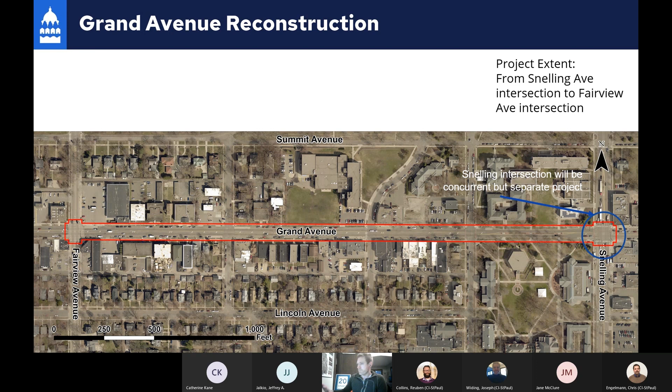The engagement really kicked off in earnest almost a year ago in March of 2022. Since then, we've been going through multiple rounds of engagement and multiple events all over the community, talking about Grand Avenue, folks' vision and desires for its future, and also looking at some location options, which we will review in a moment. Major engagement activity occurred from March to November of last year, with multiple meetings with corridor stakeholders. We've identified Macalester College as a major stakeholder, Hidden River Junior High, Metro Transit as the Route 63 bus runs down Grand Avenue, MnDOT as MnDOT currently owns and operates Snelling Avenue, and the Macalester Groveland District Council. Over the last year, we've had two previous open houses, one in June and one in September of last year. Today will be the third one, in February of 2023.

We've also attended many public events and held some events in conjunction with Macalester.

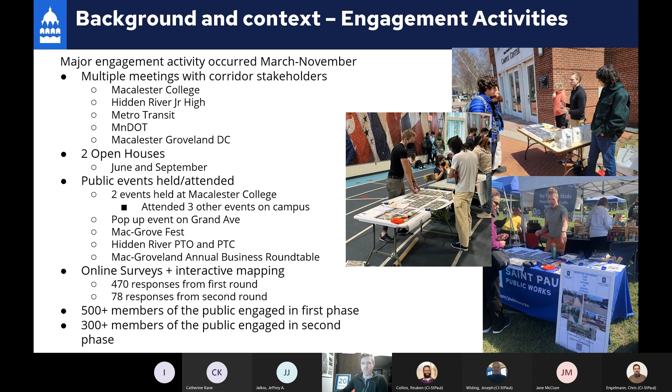The first round of surveys included more questions about how people use the street today, how that affects their day-to-day lives, and what they'd like to see in the future. That one got a lot of response, almost 500 responses. The second round of surveys, which included location options for the public to weigh in on, got relatively fewer responses, about 70. However, we did quite a few more in-person events during that second round to flesh that out a bit more. Throughout these first 2 rounds of engagement, we talked to nearly 1,000 members of the public and corridor stakeholders. So we feel we've got a pretty good idea of what the public is looking for in a reconstructed Grand Avenue. Next, I'm going to go through the location options, which were presented in November of last year for the public to weigh in on.

And we'll go in and see what the public thought about each of these location options and other reasonings why we went with one location or the other. And then finally, when we get to that layout process, we'll elaborate more on some of that reasoning for these design choices here.

So the first option here that we presented to the public was for the Fairview Avenue intersection. Really, the options here were whether to install bump outs, or curb extensions as they're technically called, or not. And as we see here, the public feedback was very much in favor of installing those bump outs, which reduce the crossing distance for pedestrians and increase safety for all users of the intersections. And as you can see, Mac-Groveland District Council also recommended the bump out option.

And one other note here that we also want to look at, as we're looking at some of these design options, is what the crash history of this intersection is. Unfortunately, the Fairview Avenue intersection is one of the few intersections on Grand Avenue that has actually seen a pedestrian fatality in the last 10 years. There was a fatality here in 2015 and also a pedestrian injury here in 2017. So when we're thinking about design choices, that kind of data really impacts what we do on our designs, and again, really helps lead us towards a safer design.

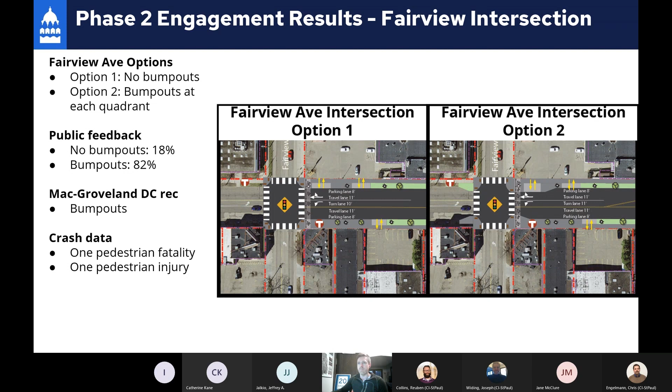Next, we wanted to look at options of potentially installing medians on Grand Avenue, specifically on parts of the corridor where you don't have left turning needs. So that wouldn't be the area between Cambridge and Macalester, more the areas between Fairview and Cambridge Street. The first option was no median, essentially keeping the street the same as it is today. Option two would be a landscape median, so think tree plantings and grass. And option three would be a hardscape median, so think just a hard curb surface with potentially some lighting features along it as well.

Public feedback was generally in support of a landscape median. However, sorry about that, the preferences were not a great majority here. About 57% preferred the landscape median, and about 34% preferred no median. Mac-Groveland District Council recommended the no median option through this section.

Crash data was really showing that safety issues aren't present mid-block throughout this corridor of Grand Avenue. We saw just 7 vehicle crashes over a 10-year period, so that's less than one a year, and one single bike incident over the past 10 years. So crash data really wasn't something we were concerned about through this mid-block section. But there were other considerations that we wanted to take into account when we decided what we're going with on this option for the medians.

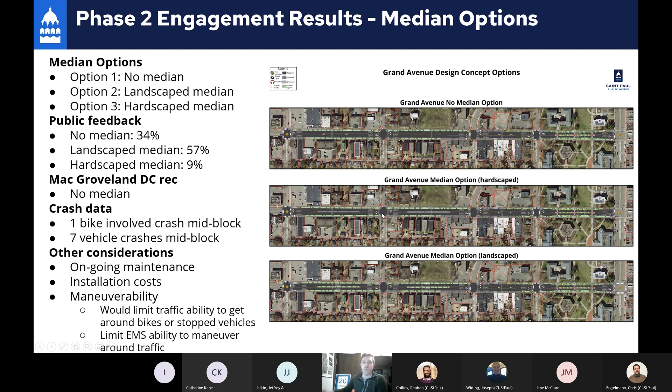Another issue that was brought up through engagement was maneuverability, specifically for emergency services vehicles. If we had a median here with a full parking lane and just a single through lane, that would certainly limit the maneuverability of emergency vehicles getting down Grand Avenue and vehicles getting out of their way. Additionally, there would potentially be issues with stalled or stopped vehicles blocking traffic through this section if a median was installed. So these are some of the considerations we took when we looked at those options.

Looking at the Cambridge Street intersection option, as we know, Hidden River Junior High is located on the northwest corner of Cambridge Street here. So with these options, we want to dive in a little more with a few more potential options for Cambridge Street to really maximize the safety of students getting to and from school.

First option is kind of our typical idea of what an unsignalized intersection would look like, with just those curb extensions or bump outs in each quadrant of the intersection. Option two was looking at a partial intersection median, which you can see here, which would be installed on that western crossing for students. Then option three would be looking at a full intersection median, which would essentially close that median to close Cambridge to through traffic, but allow bike traffic to filter through.

Mac Groveland District Council recommended option two, that partial median. As we see here, public feedback was generally in favor of option three. However, option two was the second most favored, and option one also received a significant share of those responses as well at 23%. Additionally, here, just looking at some crash data. So this is one of the more frequent crash intersections actually on Grand Avenue. Over the last 10 years, we saw 4 pedestrian crashes and 2 of those resulting in injuries.

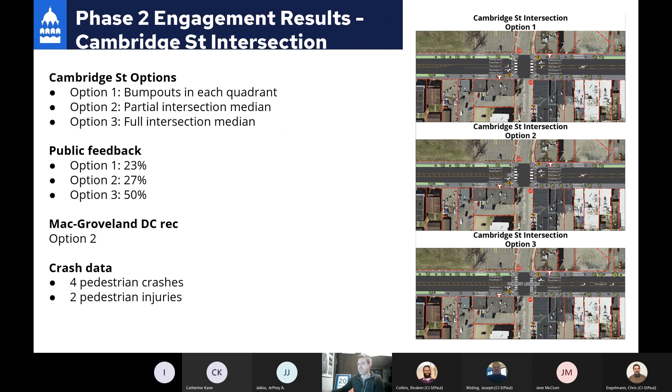Finally, one of the final options we wanted to have the public weigh in on was Macalester College and the pedestrian crossing mid-block here through campus. So the first option we wanted to give out here is just leave as is with those necessary improvements. Today these crossings are not accessible for people with disability, and so option one would be looking at adding those accessibility options, but really not changing the function of the crossings as they are today.

Option two would be looking at meeting a CIB request that we received a few years ago through the CIB process, which would be looking at installing a wider legal crossing in front of the dorms on the western end of the block while leaving the other two crossings as is. Option 3 was looking at improving and consolidating crossings, so creating two legal crossings while consolidating and removing that center crossing in the middle. Option 4 was looking at potentially a large-scale centerpiece legal crossing, so all three crossings would be consolidated into one large center crossing.

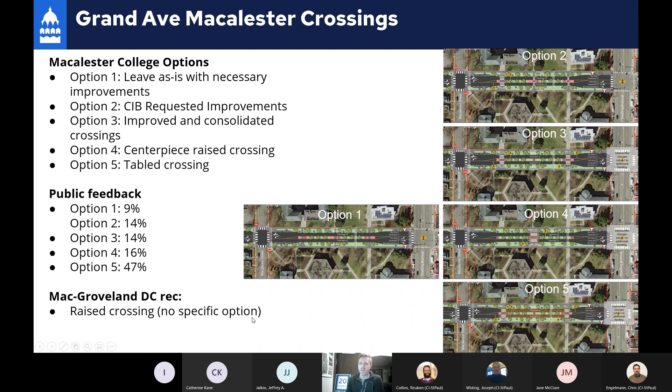And then option 5 was looking at potentially raising up and actually tabling that entire stretch here of the crossings, so you consolidate two crossings, remove the middle one, but actually raise those crossings for pedestrians to cross at grade. Public feedback was not a majority on any one option. However, option 5 saw nearly a majority at 47%, which would be that raised and tabled feature. The Mac Groveland District Council recommended a raised crossing, but no specific option on how those crossings would be put together.

Now that we've reviewed a little bit about what we reviewed over the last couple of months here, we're going to move into the recommended design. First, we'll look at some overall features of the design, and then we'll go block by block to look at how that looks on a layout view. So this design for Grand Avenue is really consistent with multiple city policies, specifically the comprehensive plan and the pedestrian plan, which are both policy documents driving us to create a more pedestrian-friendly and multimodal city. And so with this plan, we're looking to increase space for pedestrians and greenery while not impacting parking at all.

So curb to curb width will be narrowed from about 55 feet today to 48 feet in the proposed design, which would be about a 7-foot roadway width reduction. We're able to do that because today the existing width of the roadway from curb to curb is much wider than what we really need to accommodate all these functions. So with that reduction, we're still able to have our typical 11-foot through traffic lanes, which will be narrower than the existing, but typical of what we do on reconstruction projects.

We're looking to maintain that 10-foot left turn lane as is today. And then we're looking to narrow the parking lanes to 8 feet, which is also a typical sizing for projects that we do today. So we're able to maintain all that space for vehicles while also giving back significant space to pedestrians. So that total non-vehicle space will be widened from about 25 feet between both sides of the street today to about 32 feet. So adding about 7 feet, or about 3.5 feet on both sides of the street.

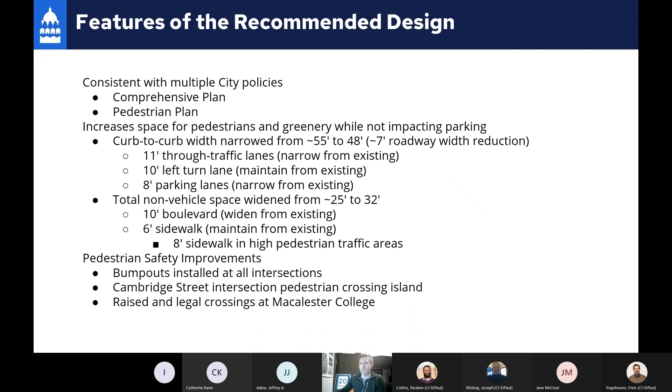At the Cambridge Street intersection, we're looking to install a pedestrian crossing. We'll look at what that looks like in a moment. And then finally, we're looking to install raised and legal crossings at Macalester College to better accommodate student crossing needs. So this is what it looks like in a cross-section view. This is essentially if you cut the street down the middle and look at it straight up. This is how it looks laid out in visual form rather than word form.

See those 11-foot through lanes, that 10-foot center turn lane, those 8-foot parking lanes. Then you finally have your 10-foot buffer, which is your boulevard space, and your 6-foot walk space. How this would look in a typical bump out cross section is in the lower left here. So it'll be about 36 feet to cross for pedestrians from curb to curb, which is significantly less than what it is today at about 55 feet. You see you've got extra space for your bump outs, your curb extensions, and your sidewalk space as well.

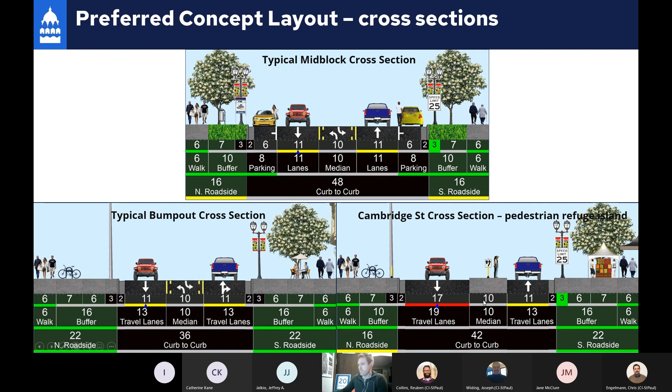And then finally, on the bottom right here is how a cross section will look at Cambridge Street, where you have that additional crossing feature for the students getting to and from school, where you see that center turn lane median is now a raised crossing median. Now we'll look at the layout and see how that looks from top down here, and I'll walk block to block.

So first, we've got Fairview Avenue here, where you see those proposed bump outs, curb extensions at each quadrant, again significantly narrowing that crossing distance for pedestrians from 55 feet today to 36 feet. Moving through here, you can see that widened boulevard space. You can see Wheeler Street here, which also has those four quadrant curb extensions, which will be narrowing that crossing distance for pedestrians and serving as traffic calming for motor vehicles moving through here.

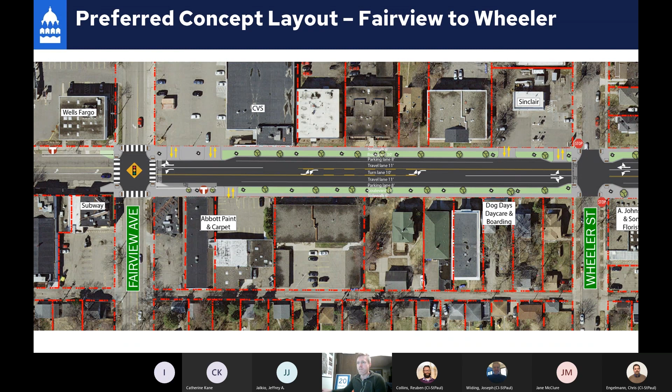Moving further east, we're looking here at Cambridge Street. I will zoom in on Cambridge Street to talk a little bit more about that. So Cambridge Street here is a unique situation. This is an area where we have an active junior high with many students walking and biking to school during those months where it's most appropriate, so during typical fall and spring school sessions.

And so the reasoning here, thinking about this intersection, is that for pedestrians on the west side, those students getting to and from school, we really want to maximize their safety. And so the design here shows a center median being converted into a crossing median, a pedestrian crossing island, that allows students to do a two-stage crossing so they can cross one direction of travel, they can stop, they can wait, and they can cross

the second direction of travel separately, and increase their safety, their awareness, and their visibility as pedestrians moving through here for vehicles to see and yield to them as they're making their crossing. Some additional data we also collected here to help drive thinking about this crossing treatment is that we saw a pretty significant difference between crossings on the east and west leg of the crossing.

So the west leg today, where that additional infrastructure will be installed, saw about 4 times the crossings in a typical day, 400 to 100, and about 4 times the peak hour as well, about 88 in that peak hour at 3 p.m., which coincides with school getting out of session, a lot of students walking across, getting back home.

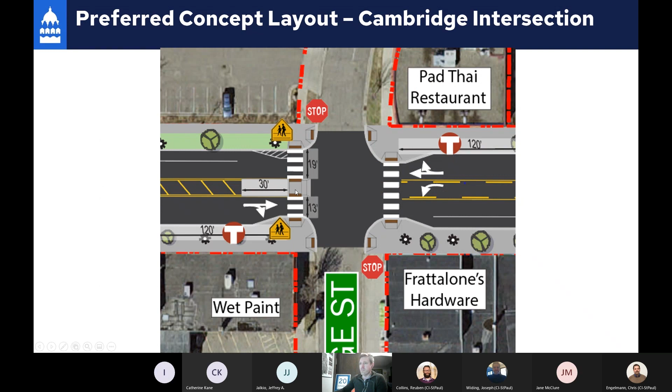Another reason why we thought it was appropriate to close that left turn lane and convert that into a crossing island here is we also counted those turning counts going from eastbound Grand onto Cambridge Street, and they really were pretty low. We only saw about 94 left turns taken in a single day, with about a fifth of those turns associated with student pickup and drop off for parents at the parking lot up here.

Working with Hidden River Junior High, they will actually be rearranging that pickup and drop off operation and shifting that further north. And so we think these left turn counts would actually decrease with those changes that Hidden River will be doing on their project in the next couple of years as well. So with those ideas, we thought it was appropriate to close that left turn lane and convert that to a pedestrian crossing island.

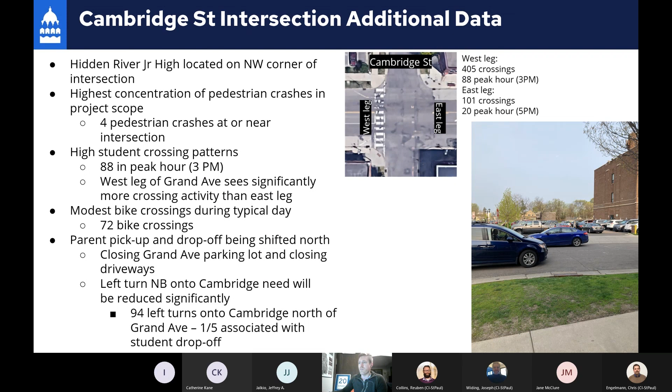A little more information on this crossing island. We've heard some feedback that some folks think that northern lane width at about 19 feet is a little too wide and could cause issues. However, looking at some additional data and examples from around the metro, it seems to be in line with what we see in a lot of other areas with pedestrian median islands, and also those safety increases from those islands. We've got studies that show about a 56% reduction in pedestrian crashes from refuge islands themselves. That's a pretty significant reduction in crashes.

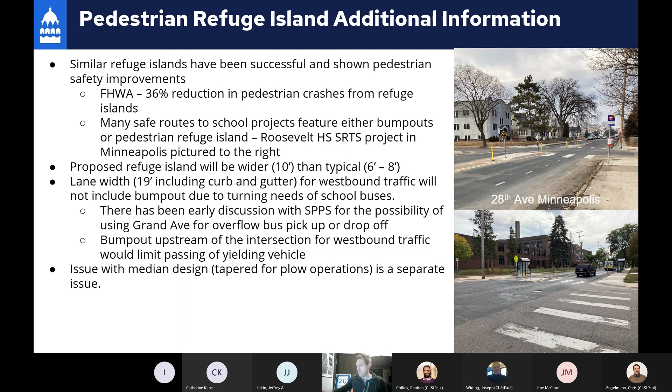One more issue that was brought up is that some folks have an issue with median design and how the curb lines are tapered for plow operations. However, that's more of a maintenance issue, and I think that is a topic for another day.

One other point we also want to make is one of the reasons why we didn't include this curb extension on that northern area, reducing that crossing distance, is because of the need to accommodate school bus turning movements. Cambridge has school buses pick up and drop off. Today they pick up and drop off on Summit Avenue, on the north side here. However, we have been discussing with them potentially utilizing some of Grand for those purposes, so we do want to make sure that school buses can make that turn.

And so, as you can see here, we ran a turning template to understand what this would look like and confirm that yes, we would need that entire space to accommodate those bus turning movements. And so that is one of the reasons why we did not include that northern curb extension for this intersection.

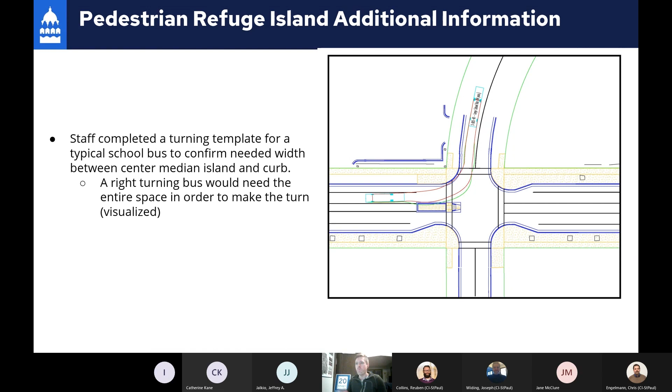Moving forward, looking at this, the block between Cambridge and Macalester Street, this is the block where we see the most retail and commercial activity. We've got a pretty intact old streetcar kind of setup here with a lot of retail shops and restaurants and cafes. And so as you can see here, that sidewalk space expanded to 8 feet, that boulevard space at 8 feet really gives you about 16 feet of room for wider cafe dining, for more product display, for more comfortable pedestrian walking through this area as well.

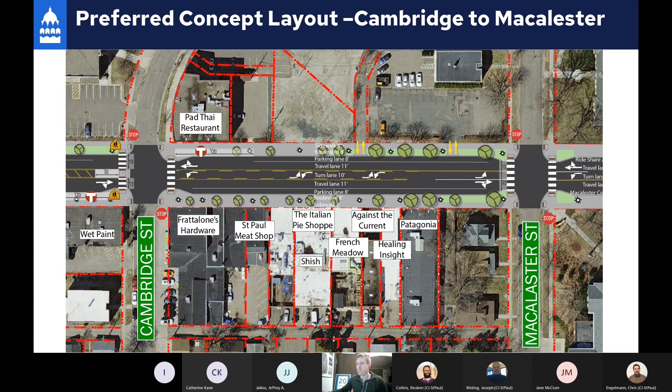Now, looking forward, one more on the last block here. This last block is going to be probably the one that most folks are interested in. This is the Macalester campus block here between Snelling and Macalester Street. So really looking back at some of that feedback we got from residents and students and other users of the street, really looking at improving and emphasizing pedestrian safety getting across the street here was something that we really wanted to emphasize and look at identifying here.

And really those raised crossings is something that we really have decided with the public that this is the way to go forward. So a raised crossing, well, there'll be a 3D image of what this looks like in a second, but a raised crossing is essentially the street comes up to the sidewalk level. So pedestrians, as they cross, they no longer have to go into the street to cross. They've got a straight, flat surface, and the vehicles have to come up and come back down, almost like a speed bump in a way.

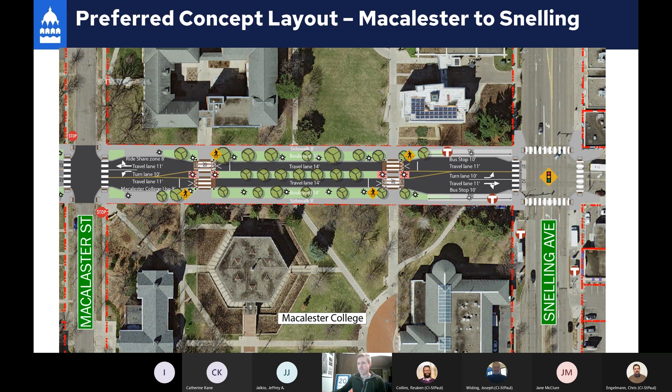But they're a little different in the fact that they're actually crossings and they're wider, and they actually provide a pretty safe and pretty easy path for everyone to utilize here. These crossings would also be legalized, and they would be requiring vehicles to yield at them. And you can see here also that middle crossing would be closed as well to consolidate into those two outer crossings. A little more additional information on why this alignment was chosen.

One of the things that we've heard in initial feedback is the width of the travel lanes through the mid block here at about 14 feet. Some thought they were a little wider than they maybe need to be. However, this 14 feet is continuing on what we've already had there in place since 2008 with the median project and with Macalester. And really this 14 feet is kind of the minimum we can do for a design like this with a large center median and just a single travel lane.

We need that extra couple feet for what we call curb reaction distance. So that's where your curb and your concrete goes at the edge. And so when you include those for both the median and the outer curb of the cross section here, you actually get about 11 feet for your actual travel lane, with about 2 feet and 1 foot for those curb reaction zones. So that is pretty typical of a design here, and really the minimum we can go for at this area of school here.

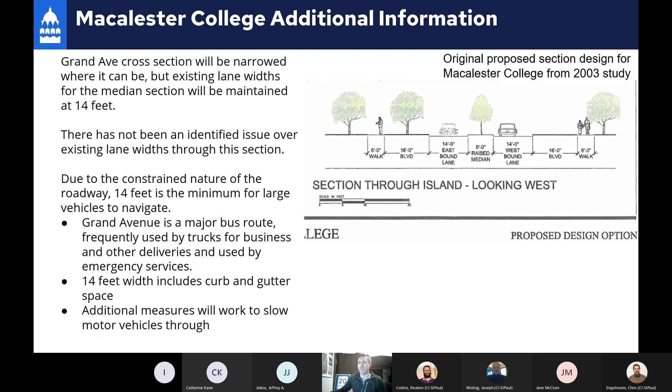But looking at why we went with these two legal raised crossings, this additional treatment here to identify for pedestrians. One of the biggest drivers here is just the pedestrian volumes crossing the street. So we did a pedestrian study. We counted every person crossing Grand Avenue mid block during a typical school day, and we saw nearly 5,000 crossings between the three.

So that's 1,800 at the one closest to Snelling, another 1,900 at the one closest to Macalester, and finally just under 1,000 at that center crossing here. So really some of the highest pedestrian crossing counts in the city. I haven't seen crossing counts this high. And so really this leads us to a unique situation where these volumes, the way Grand Avenue interacts with campus, means these mid-block crossings are likely going to happen no matter what we do.

So I've heard people asking if we could close all these crossings and have students go to the intersections to make those crossings. And I just don't really think it's realistic to expect those 5,000 crossings to all be moving to those intersections and then coming back onto campus again.

And so really looking at accommodating these existing flows and making sure that these crossings are consistent and reliable, that we know exactly where they're going to be taking place, that we know who has the right of way at these crossings, and we know how these crossings work for both drivers and for

pedestrians. And a little additional information that we also found was interesting was working with Macalester. They're doing a campus master plan here, and this little image on the right here with these gray lines kind of shows the walking patterns of students and faculty and staff through campus. And you can see here those two outer crossings definitely, again, see the most crossings.

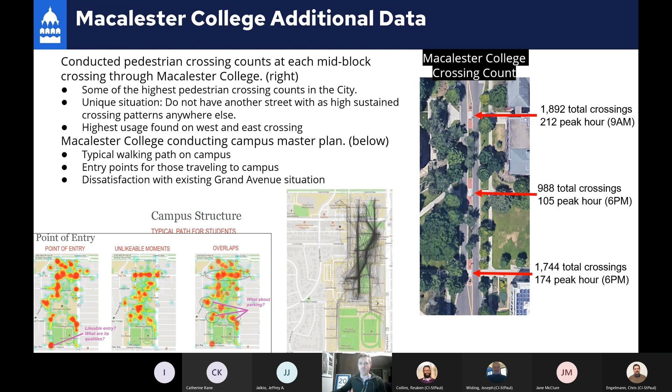Real quick here, I'm going to show a quick 3D rendering. It's sometimes hard to visualize what this could look like from a top-down view, and so we wanted to put together a quick little 3D rendering of what these raised crossings could look like on campus with those additional widening features and landscaping features here.

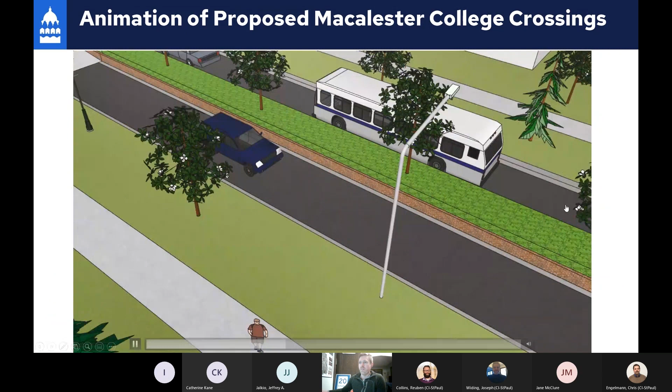So you can see here we're looking at the eastern end. We're moving over to the eastern end here, close to Snelling. This would be your eastern crossing, your western crossing over there. See the bus stop here. We can see other design features and kind of see that more in that 3D view here.

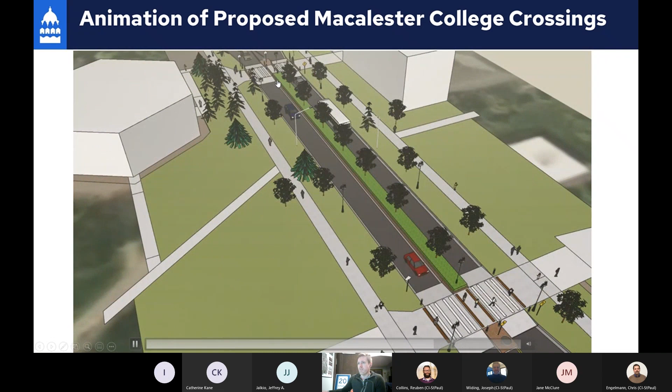So this video is on our project webpage. If you'd like to look at it again, you can certainly check that out. So just to give people a little visual representation of what this could look like in 3 dimensions.

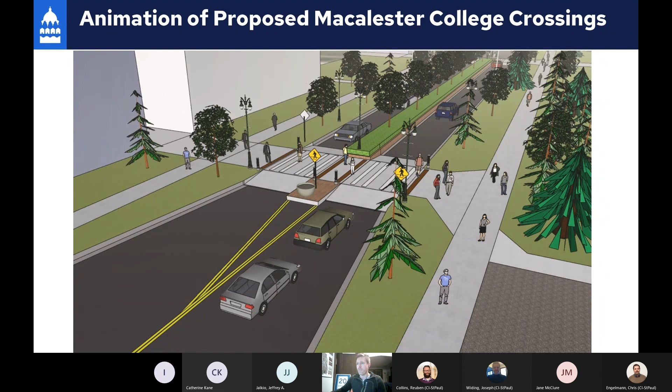Also, real quick, I want to talk about specifically raised crossings and what these could look like on Grand Avenue. So there are multiple raised crossings which have been installed at other locations within St. Paul. As you can see here, Maria Avenue. Actually, this is on the Metro State campus. That kind of goes with their main building to their main parking facilities and other facilities on one end here.

So a similar situation where you've got a lot of pedestrians moving mid-block and crossing mid-block. And so a similar kind of treatment was designed here to add a raised feature to really accommodate those crossings the best that you can.

Johnson Parkway is another project that we recently completed that has raised crossings. If you've biked or walked down the new trail facility on Johnson Parkway here, you can see those as well. And also Wabasha Street is another larger project where we've seen a raised crossing feature that was installed last year. A few examples here of other areas where we've seen raised crossings installed.

So raised crossings really have been installed on other high traffic corridors at unique locations as well. On the top left here, we've got Commonwealth Avenue in Harrisburg, Pennsylvania. This is right in front of the state capitol of Pennsylvania. So you've got that on the left, and you've got a large park here. You've got a raised crossing that runs in between those two.

This is Harrison Street on the top right in Chicago, Illinois. So this is on the University of Illinois Chicago campus and connects to the Blue Line metro station. And so you see here, you've got a similar raised crossing feature connecting campus to another side, a high traffic area here.

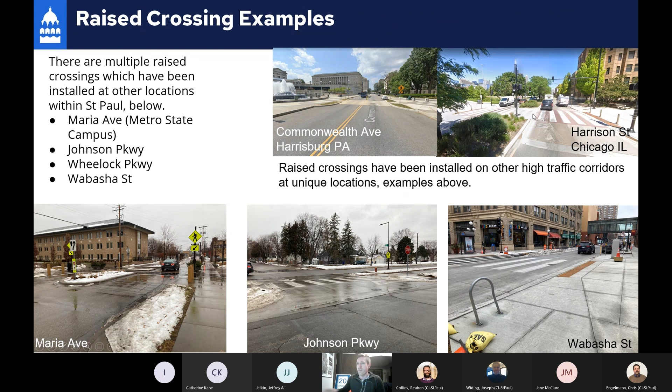Just to keep looking at some more examples here, again, as we think about how this visually works in other places. On the top left, we have Vassar Street on the MIT campus in Cambridge, Massachusetts. Similar idea, we've got large dorm facilities. We've got a lot of destinations that our students are going to, and you've got a raised crossing here to accommodate that.

Lime Street in Lakeland, Florida. You've got a large convention center on one side, and you've got a large parking facility. Again, a raised crossing here to better accommodate those large pedestrian flows one way or the other. River Road in Minneapolis, over on the U of M campus, also has a raised crossing here. This connects the river to the main East Bank campus, as you can see right there.

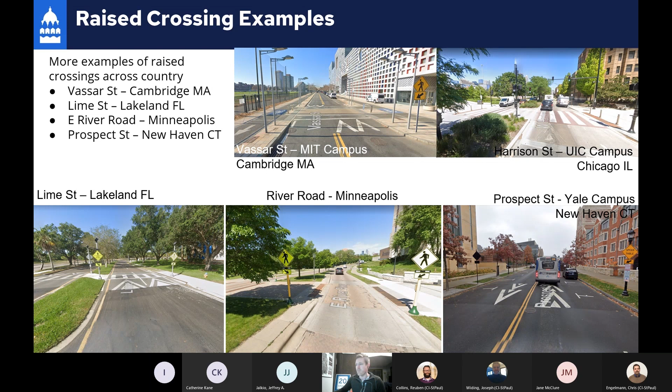And then finally, another example I'd like to show is Prospect Street on the Yale campus in New Haven, Connecticut. Again, you've got large dorms on one side, and other school facilities on the other side. So you've got these raised features to slow traffic down, to calm traffic, and to make crossing these streets easier for pedestrians.

Now, looking forward from today, we've cleared that phase 2 engagement in November. We looked at those layout options, and we're now moving on to the preferred concept and construction design. We held an in-person event yesterday at Macalester College. We had a pretty good turnout, about 30 or 40 people who showed up and chatted about this project in person. And today we have the virtual open house version of that.

Moving forward, we'll be moving into final design and construction design over the next year and the next 2 years. City staff will begin creating construction designs this year. We will also be beginning the MnDOT review of these designs this year as well. And then finally, moving to project construction in 2024. Construction will likely run the full construction season from May to November 2024.

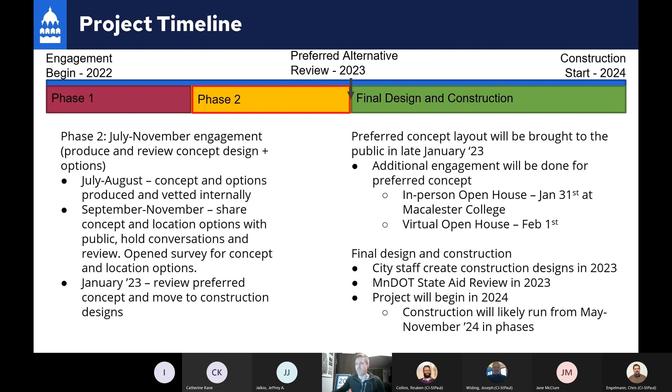Likely in phases. We do have those big users like Macalester College and Hidden River that we will likely need to be coordinating with to make sure the impacts on their operations are as minimal as possible through construction. How that looks at the end of the day is still to be seen, but that is certainly something we are already thinking about and preparing for, making sure that we accommodate those users through this potentially difficult construction process.

If there's any further questions or comments, you can send them to me or my partners in street design, who will be working on the actual construction designs and will be taking over the project from me following this point. However, we're all here today, so I would like to open it up to any questions or comments from those attending. Feel free to speak your mind and we can have a little discussion. But all the visuals I've been showing today are on the project website. I can actually show those to you while we are here.